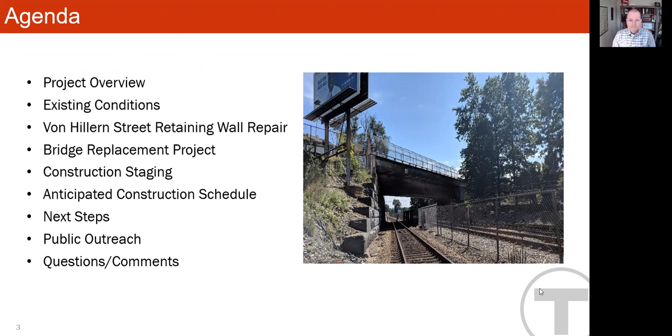The Dorchester Avenue Bridge was originally built back in the 1920s. A portion of it was rehabilitated in the mid-70s. So it's reached the end of its useful design and service life. But it's also becoming more and more of a safety concern for the MBTA, and that's why we have proceeded with this project. First we looked at rehabilitation and repair options and arrived at a decision to replace the bridge in its entirety.

The steel bridge carries vehicles, pedestrians, and bicyclists over the Red Line, as well as the Old Colony commuter rail line that services the South Shore, and also a series of Cabot Yard maintenance tracks, which is also a big factor for the Red Line subway vehicles. The project scope includes full replacement of the bridge, and a unique feature of this structure is that it also serves locally as a portion of the Red Line tunnel roof, which is directly below span B of this bridge. We also do some preservation work on the adjacent Von Hillern Street retaining wall that I mentioned earlier.

The one thing that we really wanted to highlight tonight is that during next summer, summer of 2022, and for stage 4 of the construction work, which is our demolition and installation of new structural members, the bridge is going to be closed for approximately 4 months. We'll get into that more later, but that'll be for the roadway above.

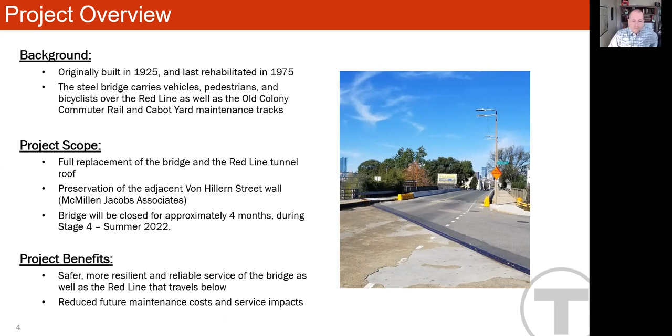Project benefits: we'll end up with a safer, more resilient, and reliable service of this bridge, as well as the Red Line tunnel that travels directly below. We'll have reduced future maintenance costs and service impact, both for the public way on the top surface of the street and also for our transit passengers below. Next slide.

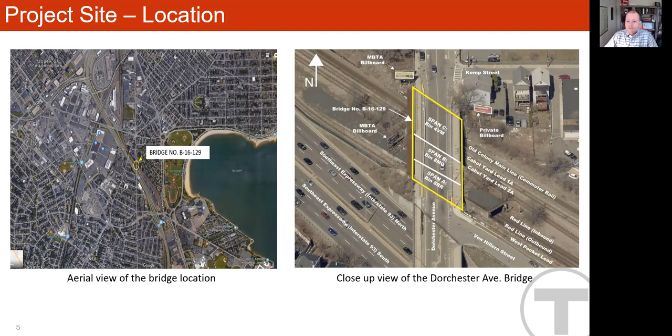And then span C at the top of the screen is situated over top of the two Cabot Yard lead tracks, as well as the Old Colony commuter rail line track at the very northern edge. Next slide.

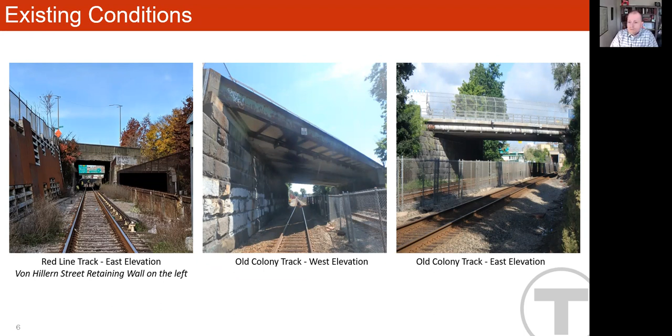The center photo is the Old Colony line looking west or outbound from Boston. And the right photo is also the commuter rail line looking inbound or north towards Boston on the train direction. Next slide.

The Von Hillern Street retaining wall was built as part of the expressway project back in the 50s, and has also reached the end of its service life. We've had some deterioration, and we're going to address that and stabilize and provide for a long-term service life for that structure. But during construction, we're going to be impacting some issues up on the street, and we look to do this work ahead of the bridge work and get it out of our way, so that for the bridge contract proper next year, this work is already done and the wall has been stabilized.

So this will be a summer 2021 issue, but it's really going to be isolated to the area immediately adjacent to the wall. The wall is about 300 and some odd feet long. It gets up to about 40 feet high at the high end, and it's directly below Von Hillern Street. So when we are working, those spaces will be cordoned off with construction barrier, and we'll also have police details on site to manage local traffic flow through the zone. Next slide.

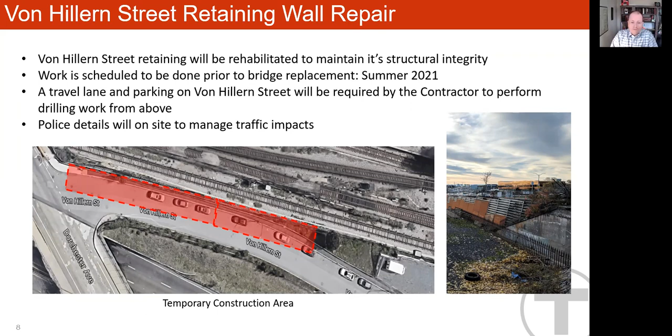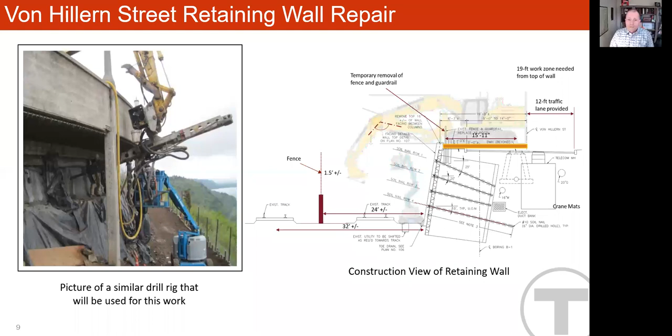So now we'll get on to some aspects of the bridge replacement project to just get everybody's bearings straight. This is actually the Dorchester Avenue Bridge looking north into Dorchester. The tracks are below to your left and Boston is off to our left. So next slide.

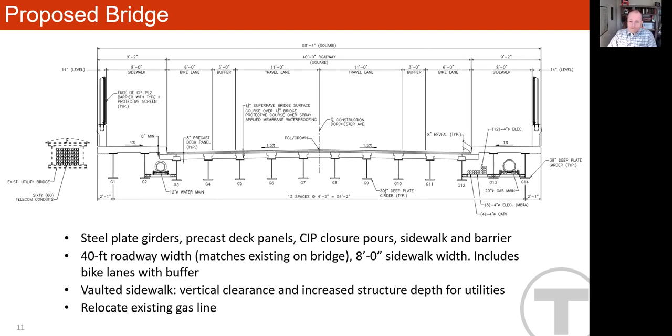We're only allowed to shut that off with National Grid in the summer months when gas is on a low demand because of temperature concerns in the New England region. So that's a driver to our construction schedule, and it kind of forces us into a hard start and a hard stop in terms of the gas main outage. And it can't be supported temporarily while we demolish the existing bridge. So that's one of the unique features of the bridge, and we'll touch on that a little bit later as well. Next slide.

Here's a plan view of our replaced bridge. And no, we're not going to paint the deck in all of these colors. We just wanted to highlight the sidewalks and the bike lane, but also the buffers that are going to be provided for our bicyclists across the entire length of the new bridge. So just to help them pop out on the graphics tonight. Next slide.

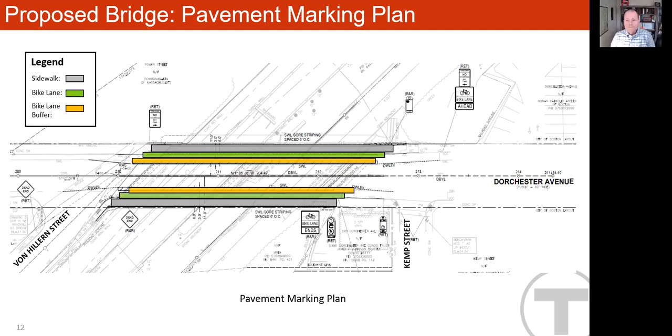I'm going to turn things over to Chris Kretsch. He's a partner at Capital Delivery and another project manager, but we're working together on this project. He's going to go through some of the construction staging and traffic concerns for the project. Chris? Hi, thank you, Carl. Like Carl said, my name is Chris Kretsch. I want to thank all the attendees for attending tonight. I'm going to talk a little bit about the construction staging and how we're going to build the bridge and what those impacts are going to be for the traveling public.

Stage 1 is the kickoff of the construction activities on the bridge. It's going to happen in spring of 2022. The idea here is that we'll be taking the utilities that are located on the bridge, both within the sidewalk and underneath the bridge. As Carl showed in the cross section, there's quite a bit that we have to relocate. And we're going to put those out of the way to enable the bridge to be demolished and then also the new bridge to be constructed.

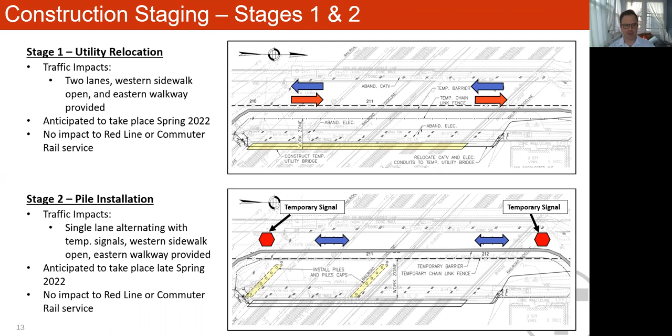After stage 1, we'll move into pile installation. These are the foundations that support the bridge superstructure. The traffic impacts during this time will be a single one-way alternating traffic scheme with temporary signals on each end. This is anticipated to take place in late spring. And as you can see in the bottom figure of the diagram, we are building the piles in 2 halves. So we're starting with 1 half in this stage 2, and then in stage 3, we'll build the other half, which we'll see in a second. There are no impacts to the red line or commuter rail line during stage 1, 2, or 3.

So stage 3 is just a mirror image of the pile installation that we're doing in stage 2. Same impacts. This will bring us into early summer 2022.

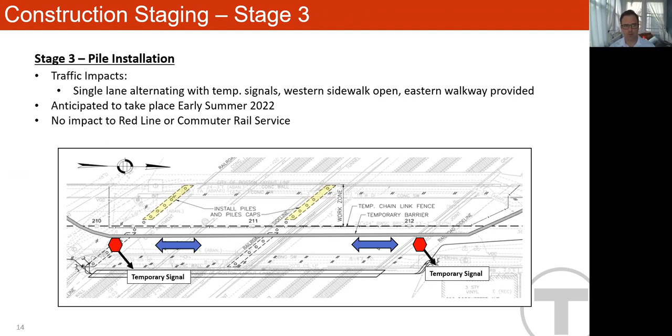Stage 4 is the bridge closure. And this is a very important stage for the construction of the bridge. This is where we're going to demolish the existing bridge and construct the new bridge, install the girders, install the deck. And to accomplish this work over the railroad and with the traveling public that uses the bridge, the easiest and quickest way to do all this and minimize the impacts to all the stakeholders is a complete outage. So although it hurts when the bridge is out, we're using accelerated bridge construction techniques to keep it to a minimum. And this is going to take place in the summer of 2022.

As Carl had mentioned, the real driver behind that summer timeline is the National Grid 20-inch gas main that has to be taken completely out of service. So during this time, there'll be a lot of construction activity, and we will utilize some weekend closures and busing diversions on the rail lines below. There will be detours for pedestrians and also for vehicular traffic and bicycle traffic as well.

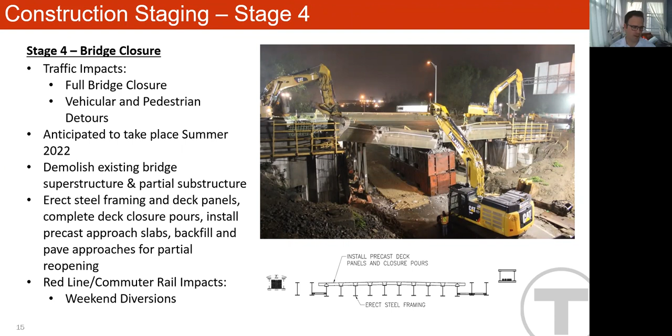The detours we're envisioning for the project will reroute kind of 2 detour routes. We'll have a primary detour, primarily for the heavy vehicles, utilizing the I-93 highway corridor between Columbia Junction and the Andrew Square exits. You can see that detour outlined in blue on the graphic on the screen. An alternate detour will utilize local roads, Columbia Road to Boston Street. And from that point, you can access Andrew Square.

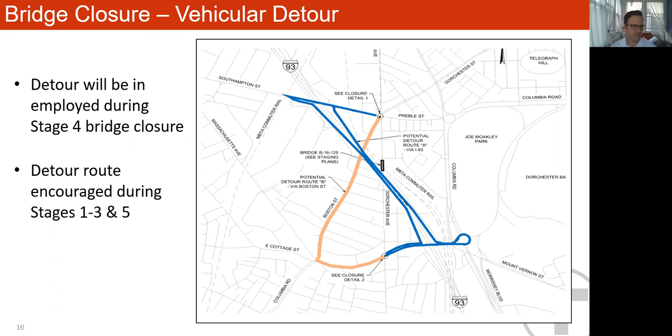The pedestrian detour will utilize local roads around the bridge, diverting pedestrian and bike traffic to Boston Street. It'll utilize Howell Street, Boston Street, and then it can either use Songin Way, or if people are continuing on their way to Andrew Square, they can just continue down Boston Street. And that is depicted in the peach orange colored line on the figure on your screen.

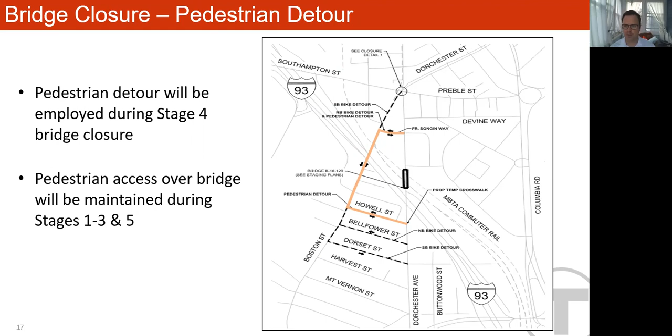So after that work happens, we've demolished the bridge, we've installed the new girders, we've installed most of the concrete deck. We still have some more construction to do, and that's this stage 5. In stage 5, we'll have a good portion of the structure built. We will return traffic at a reduced level to the bridge, and also have bike traffic and pedestrian traffic on the bridge. What we're doing here is we still have to relocate the utilities that we removed from the bridge in stage 1 and put them back on the bridge.

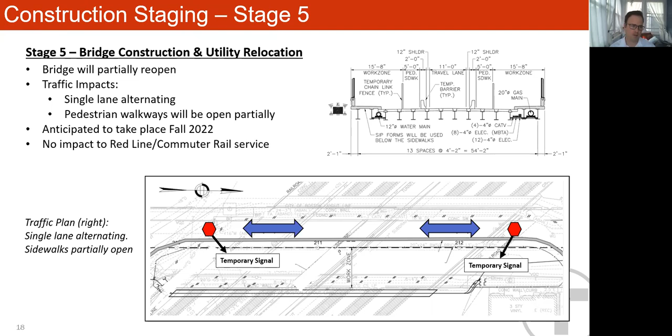So during stage 5, we'll utilize a one-way alternating traffic scheme with temporary signals, and we'll utilize work zones on either side to relocate the utilities and build the new sidewalks. This will take us into fall 2022. And again, this work is all done from the roadway deck, so no impact to the rail service below the bridge.

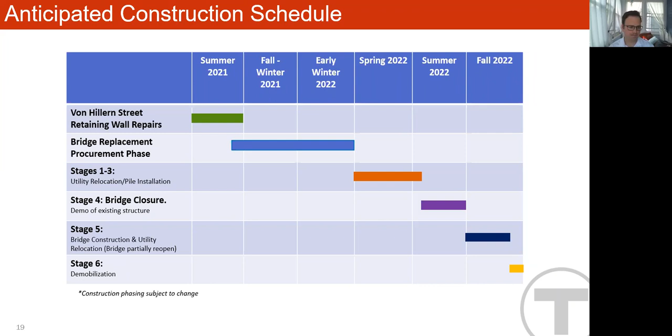The next step is to advance the design to 75%, and then shortly after that, 100% design. We are proceeding on an accelerated design schedule. We're going to have another public meeting in the fall of 2021. And then prior to all the construction activities that I just talked about, we're going to make sure we touch base with the public again in early 2022. And through this time, we will have continued municipal and stakeholder engagement.